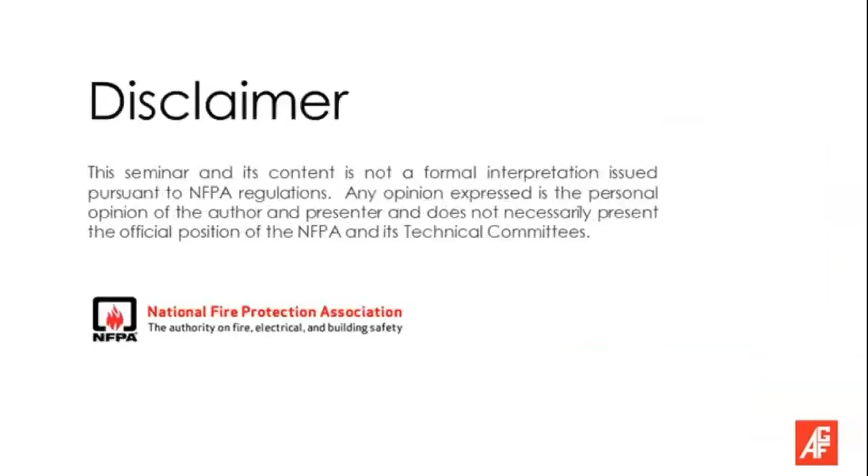So let's get started with this, and we'll kind of move a little bit faster. So as I started to say, AGF Manufacturing is basically a family-run corporation that's been around for 30 years. We specialize in manufacturing products specifically for the fire sprinkler industry. Typically, there are ancillary products like the valves and other devices that are used to control sprinkler systems.

We're probably most familiar with a product line of ours called Test and Drain, which are valves that are found in the stairwells of most buildings. But today we're going to be talking about dry systems because, well, it's winter out, so why not?

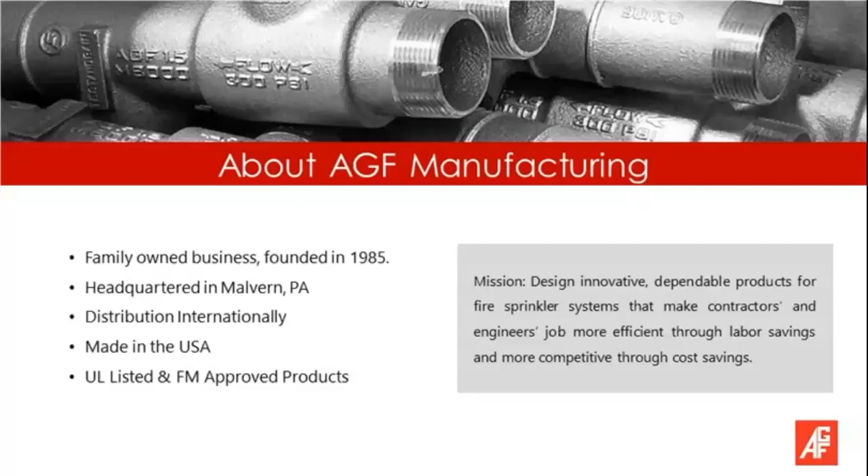So with regards to dry systems, basically the code regulations for dry systems are anywhere that you have an area of a building or a structure that can't be maintained at or above 40 degrees, you need to use something called a dry or pre-action system. A pre-action system is basically a dry system. And as part of that, all those systems need to have auxiliary drains so that you can potentially eliminate the moisture from those systems.

Now, dry systems can be very large, protecting an entire structure like a parking garage or warehouse or a manufacturing facility, or they can also be smaller subsystems protecting areas like one level of parking under a store, office, or multifamily residential complex. They can be used in hospitals, hotels, and in senior care facilities covering entryways. Ambulance bays, loading docks are also common locations for them, as well as places like garden centers in home centers, and even outdoor dining areas in restaurants. Even places like the garden centers and the outdoor dining areas that aren't actually used in the winter still need to have those protections.

I'm going to concentrate today. I mean, dry systems are a pretty broad topic to cover in just a 25-minute period, so I'm going to concentrate on the part of the system that sometimes creates the most issues for building owners and managers, the auxiliary drains. These are also sometimes called drum drips. They just have a lot of different terms.

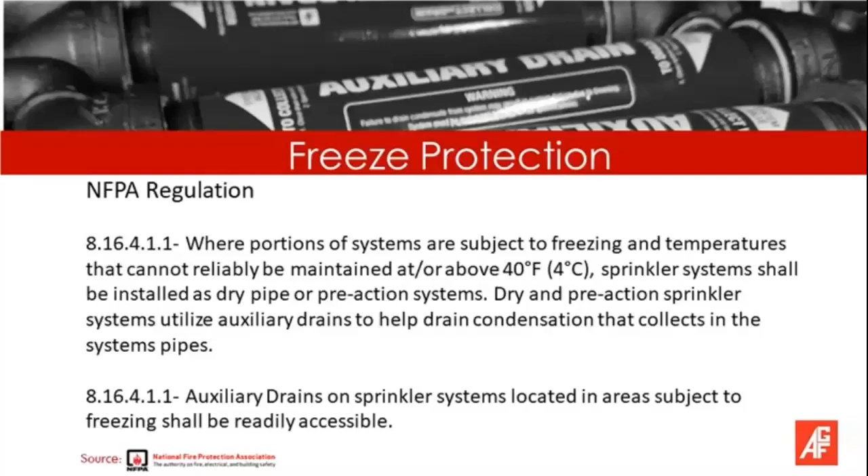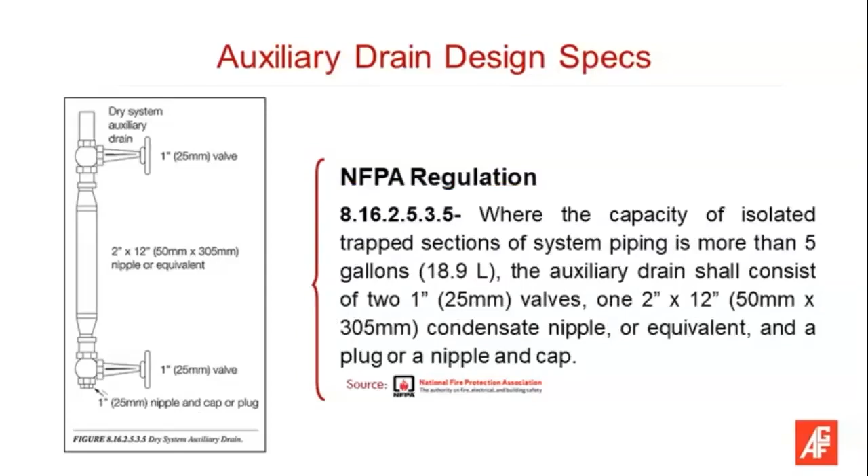And if you look at this slide on the left-hand side, that's pretty much what a typical drum drip looks like. So as the code would say, where the capacity of an isolated trap section is over 5 gallons, the drum drip is basically comprised of these components. If it's under 5 gallons, basically you can just put a valve there. The goal, of course, with a dry system is to get any water that might be in it out of it. So that's your basic drum drip from the standpoint of NFPA.

This is kind of more like what one looks like in the field. It's just an assembly of parts, and the way it works is in order to be able to empty it without exhausting the air out of the system, you need to close the valve at the top, open the valve at the bottom to drain out any accumulated moisture, then close the valve at the bottom to reopen the valve at the top.

Obviously, a dry valve is what starts at the beginning of a dry system, and it's holding the water at bay, and then the system is filled with compressed air. And if you were to just open both of these valves at the same time, the dry valve would assume that that was a sprinkler head activation and would release the water. So that's why you have this sort of isolated chamber.

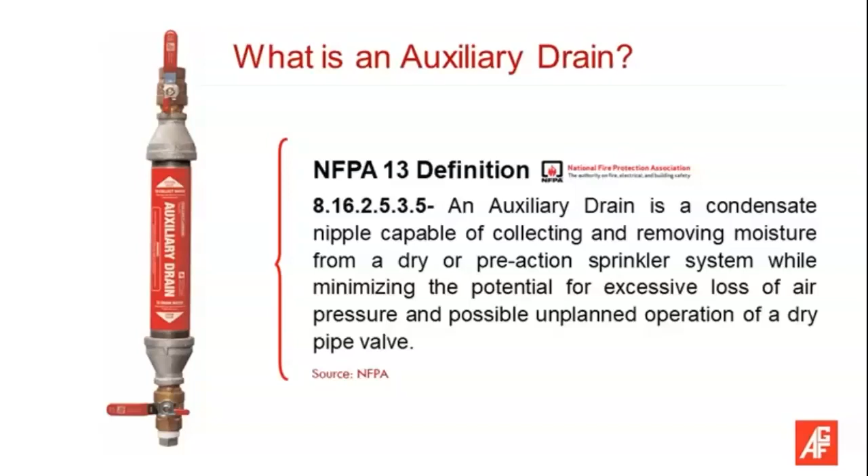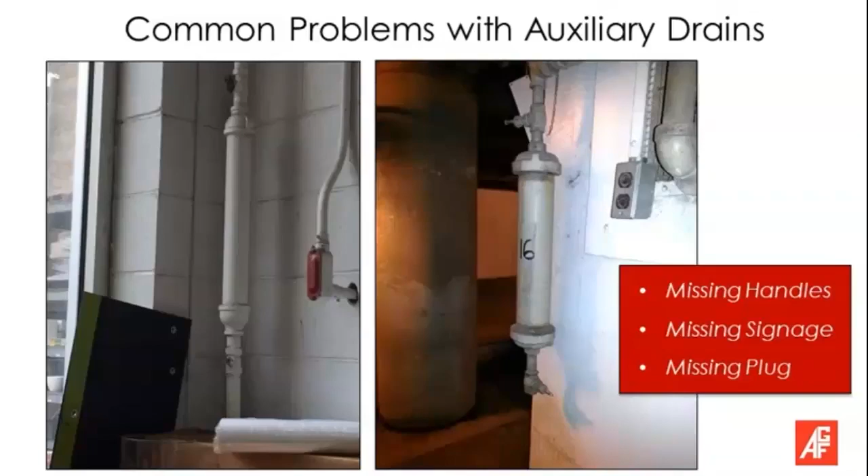But as an example, these things are supposed to have signs on them. The one on the right, you can see there's a chain hanging there, but there's no sign, and both of these have no handles on them, and nobody knows what these are, so they're sometimes difficult to identify.

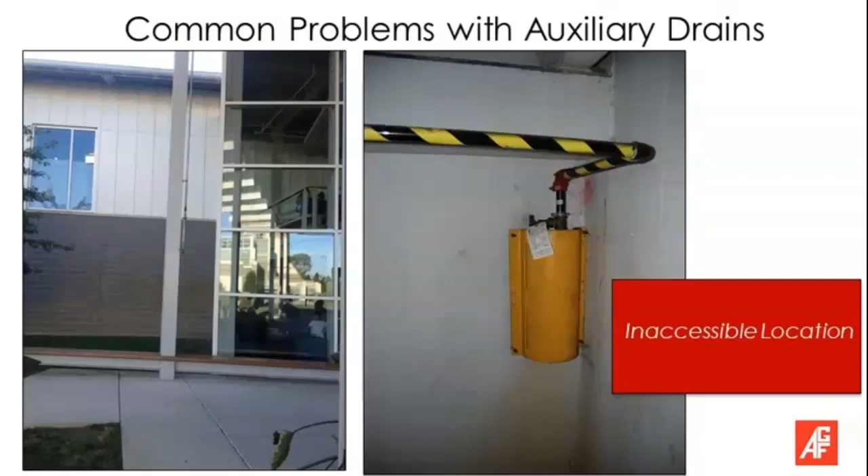Here's a couple others that we've seen out in the field. The one on the right, it's kind of behind a bollard, which makes it almost impossible to get at the valves to drain that, but it also makes it kind of out of sight, out of mind there. And the one on the left, that picture is a little deceptive in that that's about 15 feet in the air, which just makes it very difficult to get at.

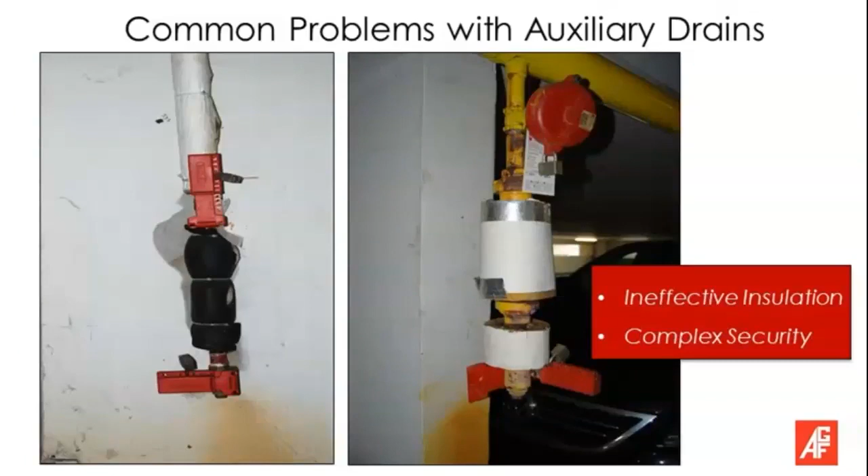Here's examples of drum drips where people have tried to put locking devices. Obviously, they were in a public area, which were prone to being tampered with. They're also trying to insulate them, and this kind of gives you a false sense of security as to both potential freezes and breaks and also tampering.

Most people aren't aware of the process, and we did a lot of testing on how drum drips break, and unfortunately, it doesn't take a lot of moisture. Some people think that based on the fact that this entire drum, which is over a foot long, can be filled, then they're not going to have a problem. The reality is you can get a drum drip to break with less than 2 ounces of water.

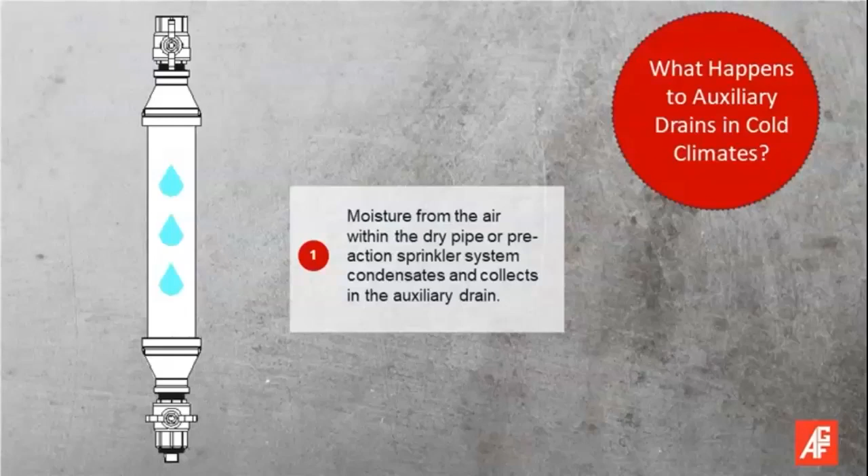So what will happen is condensation will build up in the drum drip. It'll start to accumulate in the bottom of it. And then you'll maybe get a cold cycle. Now, if there's enough room in the drum drip, as that water freezes, it expands, and if there's enough room for it to expand, you may not end up with a problem. But what will typically happen is that the next day, you'll have a partial warm-up, and you'll start to get a pool of water that will collect under this chunk of ice floating in the pool of water. The water takes up less room, so the ice drops in the unit.

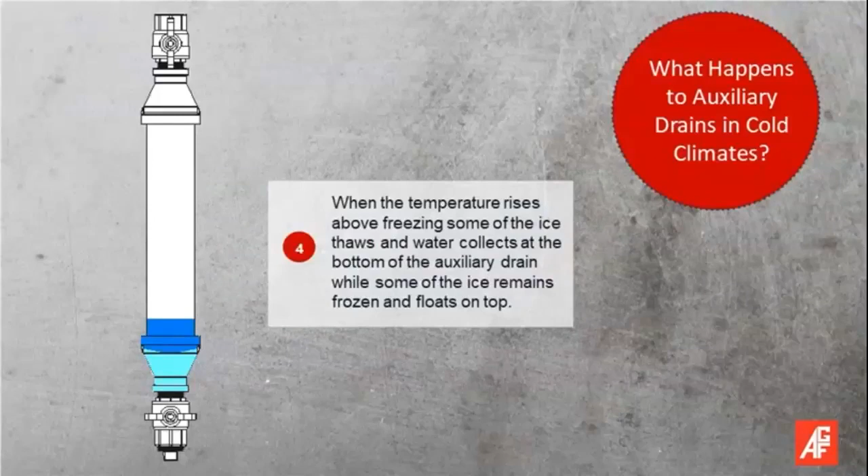And then the next day, or that night when it gets cold again, the ice will grab a hold of the sides of the pipe before all the water has frozen, and as that water starts to transfer from a liquid into a solid state, it will try and expand, but now it's trapped between the ice block and the valve. So that's what causes these things to break. And as I said, in testing, we've been able to get them to break with less than 2 ounces of water.

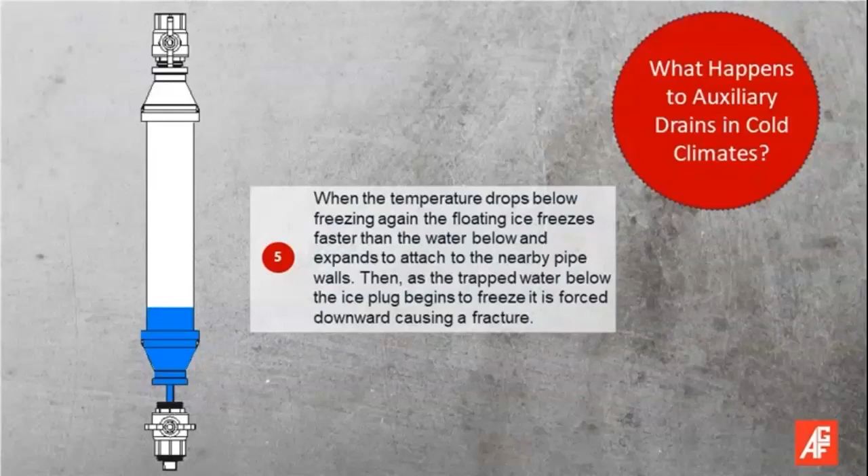What happens then is you'll typically have a breakout at the valve or the threads or the fitting, and then as soon as the ice plug melts, it will release the water, and that will end up tripping the dry valve, and now you'll fill the system with water, and of course you'll have water shooting out of this drum drip all over wherever it is located until you get it serviced.

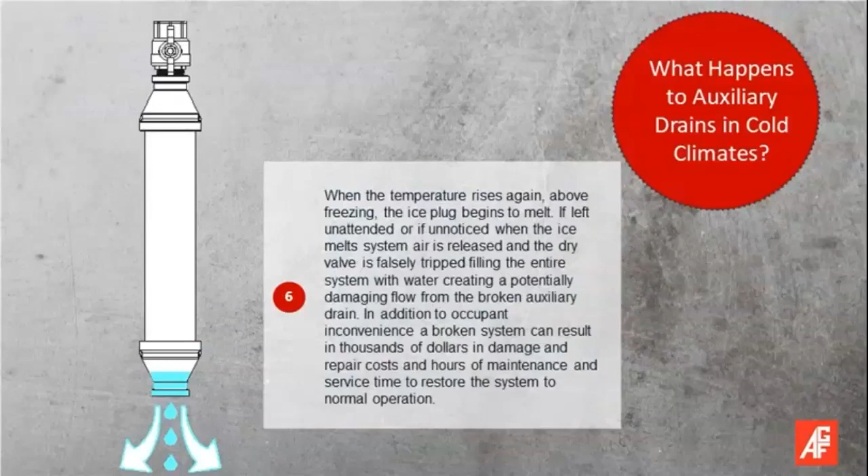This is the best picture I've ever been able to take of a broken drum drip, because what we're looking at there is actually a ribbon of ice coming out of the bottom of the valve. Ice can be a very destructive medium, as the people, unfortunately, on the Titanic discovered. That's actually a ribbon of ice. That valve has been fractured. There was nothing wrong; it was a good quality valve. I blanked out the name on it because it certainly wasn't the manufacturer's fault. Basically that little ribbon of ice has pushed and fractured the body of that valve and separated those two from each other.

So what did happen in this parking garage would be that as it got a little bit warmer over the next day or so, that ice would start to melt out. That piece would probably fall to the ground, and as soon as whatever ice plug is left inside this drum drip melts out, then the valve would trip.

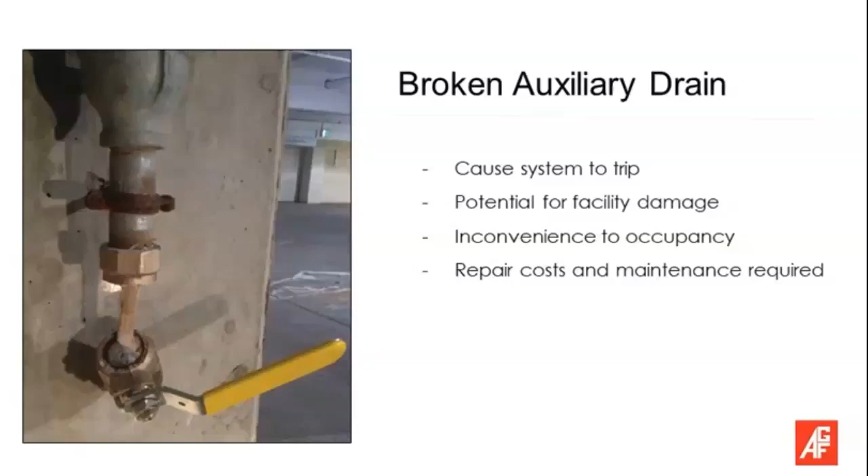The problem you have is that the amount of condensation that might accumulate in an auxiliary drain is impacted by too many variables to be able to determine a specific frequency for checking the drains to prevent these types of problems.

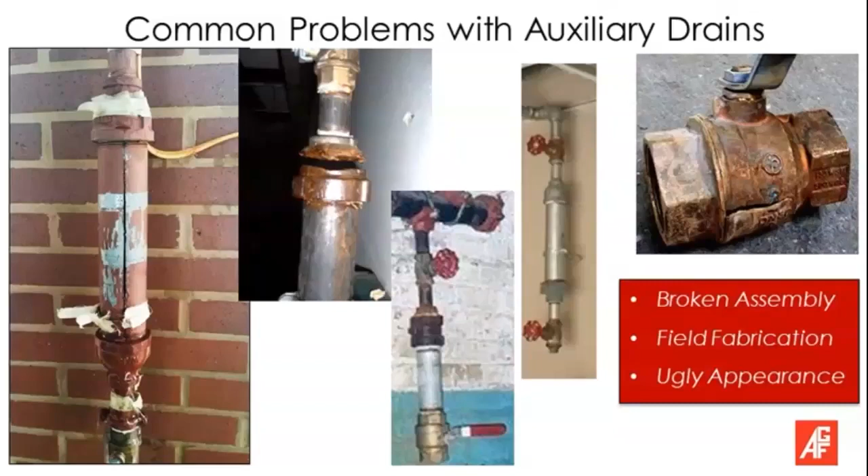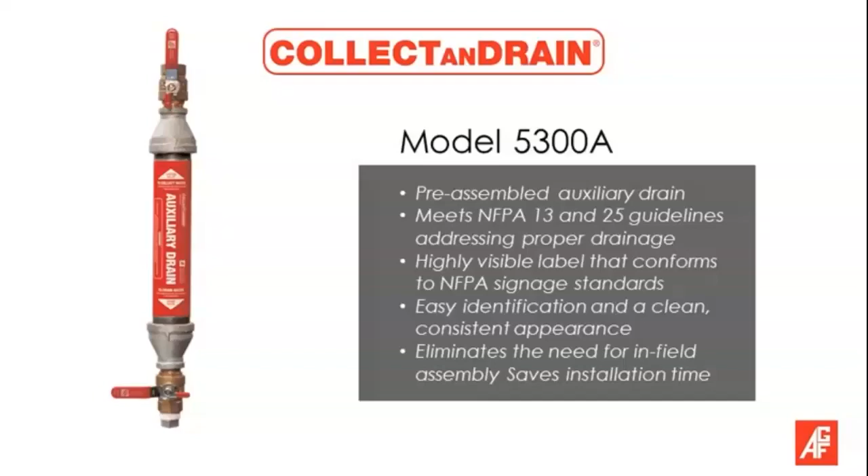This is kind of our group of products that are designed to deal with that. Although NFPA only had that one diagram, based on feedback from people like yourselves, people who install systems, we started to ask people what some of the different problems they were encountering were, and we tried to come up with solutions for some of those problems. This is the basic drum drip that we talked about earlier.

One of the biggest and silliest problems people mentioned was that the people who did it last year aren't still with us this year, or the process of doing it didn't get translated well, and as a result, they inadvertently tripped the drain, things of that nature. Or if you remember those pictures of the ones that were just painted white, nobody knew what it was, and therefore they didn't want to touch it. Plus, it had no handle, so nobody was able to know what to do with it.

So we actually just put signage right on the unit identifying what it was, and then we also put the instructions on there as to what to do with it. This was designed to make it easier, say, for the person who might be responsible to do this the first part of November and hasn't touched this thing since March of the previous year, and remind them of the process.

Also, it's a requirement of code that these things all have signs on them, and typically it's a hanging metal sign that's hung off the pipe. A lot of times it's not there. A lot of times it's lying face down on the floor of the garage to get sucked up by the Tennant machine. So we thought literally putting the sign on the unit would be a better way to do that.

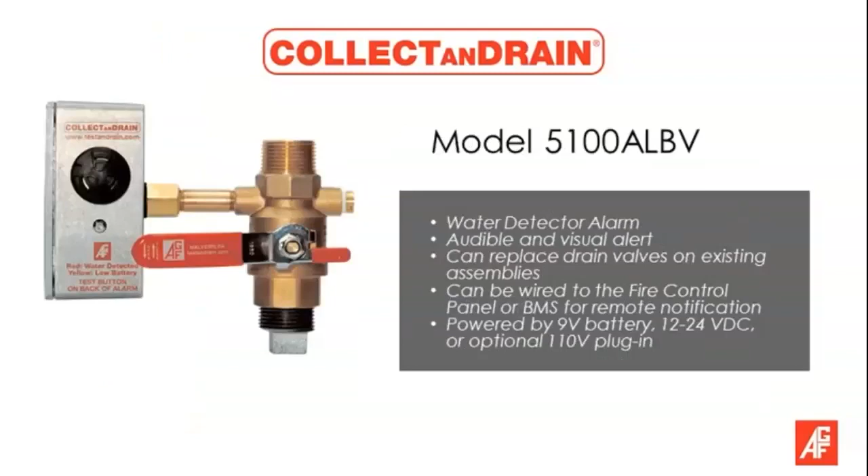This is a small little device that's designed to chirp and alert you to the fact that there is moisture in the drum drip. Just gives you an audible alarm.

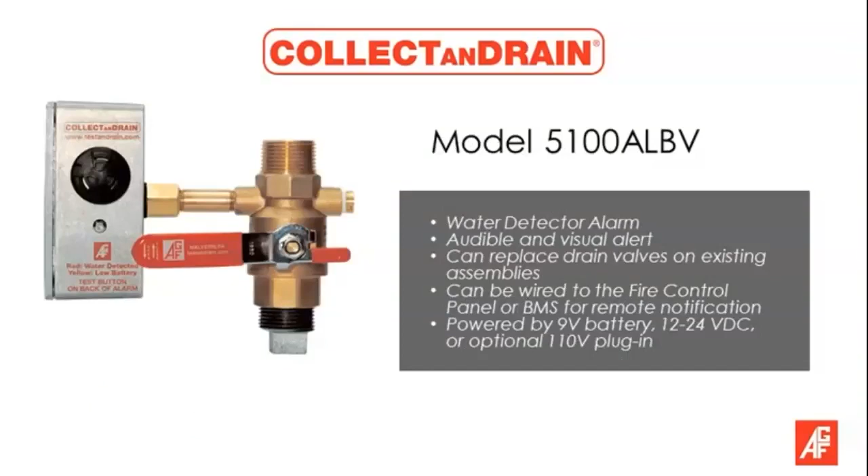One of the people in our office here joked about the fact that when they go home at night, everything in the house chirps at them when it wants its attention. The washing machine, the dishwasher, the dryer, the kids, everything.

So why couldn't we make something similar for a drum drip? These would just be placed in the bottom location of a drum drip. As I said, we can get a drum drip to break out with less than 2 ounces of water. So any amount of water in a drum drip can present a problem.

Here's an example showing that installed onto an older drum drip that was already existing in the field. It can be easily retrofitted on. As the block on the right-hand side says, this thing can be powered either by a battery, 12 volt, 24 volt, or even 110 volt.

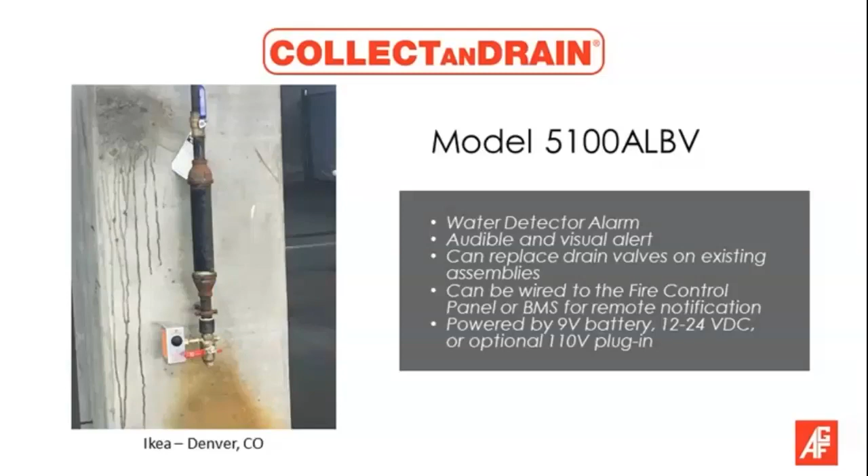And it would just chirp to let you know. It's sort of like the battery detection alarm in a smoke detector. In other words, the battery is wearing out, time to change the battery. Or you can get it actually on a drum drip already pre-assembled.

Now, this whole assembly could also be flipped around, and you could have this thing at the top, but you would only want to do that if this drum drip was in a conditioned environment. Where we've seen that done is in a lot of nursing care facilities.

They have dry systems up in the attic of the facility, but then they bring the drum drip or the auxiliary drain down into the first occupied level of the facility, in which case we're more concerned with the drum drip filling and the water going up into the attic where it would be at risk of freezing. But if this is in a conditioned environment, then the alarm could certainly be put in the top position.

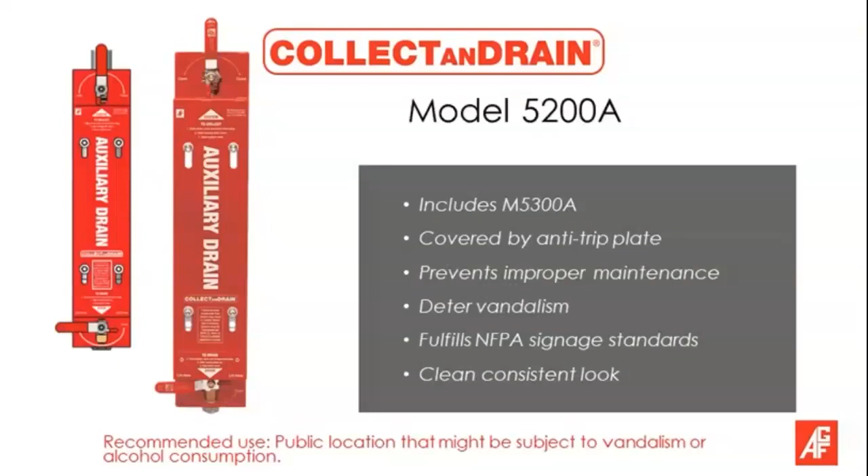This was an invention we came up with. We actually have a patent on this. This was designed to keep people from being able to do the process wrong. This is based on feedback we got from the home center industry, typically the garden area, that they had problems in the summer with some of their summer personnel actually thinking that the valve on the sprinkler system was a great place to get water to water the plants in the garden center. And unfortunately, they would end up tripping the systems.

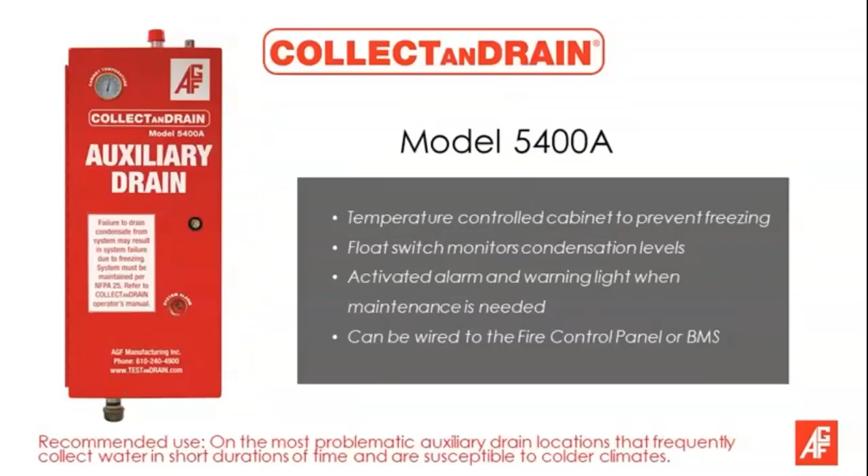And then we move to a model 5400, where we create a conditioned environment for the drum drip to live in. So this is a heated box. It is heavily insulated. It now has a float switch in it.

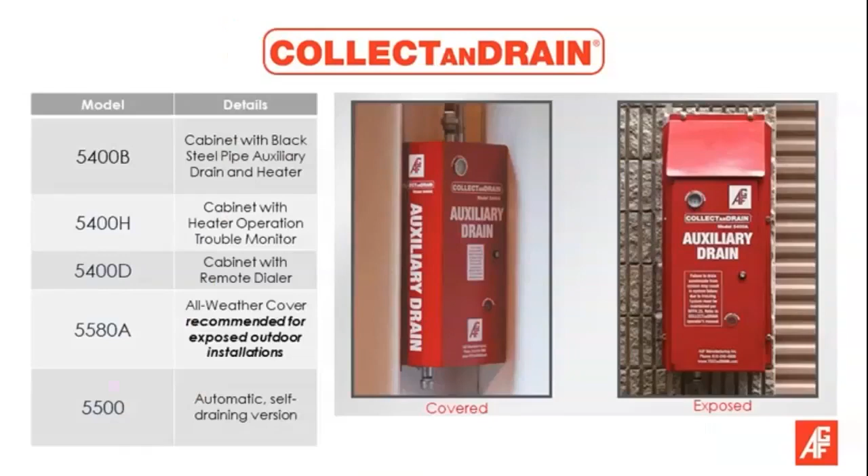Since the drum drip is being safely kept above freezing, we can allow water to accumulate in this to the point of being full, and then it would alert you to the fact that it needs to be emptied, which just makes servicing it a lot more worthwhile, because you're only servicing it when it really actually needs to be serviced, rather than guessing if it needs to be done. And then we make that in a couple different versions. And basically that's kind of it.

So now I'll open it up to questions. And here's one question. What is the life expectancy of a dry system? Well, there was a study done a couple of years ago by a company called VDS, which is like the European equivalent of UL and FM.

And they did some long-term extensive studies, and they discovered that within about a 12.5-year period, 73% of dry systems would be considered compromised, typically by corrosion. Most dry systems are built using galvanized pipe. Galvanized pipe is designed to basically keep pipe from corroding from the outside in. But a lot of times, dry systems have a problem corroding from the inside out.

What happens is you have a situation where your galvanic coating might either be thin or missing or chipped off or something like that inside the pipe. And as a result, corrosion will really bore into that space.

Also, when they cut the threads into the pipe or cut a groove into the pipe, a lot of times they will end up literally cutting off the galvanic coating, and then that creates a point where the pipe will be vulnerable. One of the best things to do is to make sure that the pipe is pitched correctly so that you get as much water out of it as possible.